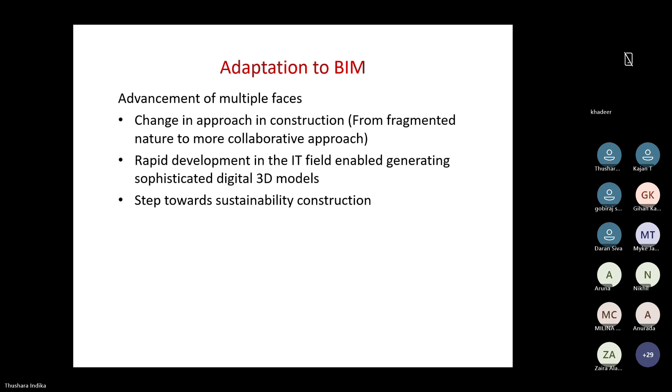One is, of course, to work as a collaborative team, and they have also given recommendations to reduce disputes. So they introduced alternative dispute resolution in their reports. That's why they changed the approach in the UK.

So in the software phase, we started, or the software engineers started programming with machine language like 0101, and then they developed that machine language into something called assembly language. I'm not going to explain all of them, these are IT stuff. Then they moved to structured programming, like you must have heard about C software, right, and database C. And then they moved to something called object-oriented programming.

If you want to know about object-oriented programming, there's a link below to a nice YouTube explanation, about 20 minutes, that explains it very well. We as quantity surveyors don't have to know much about how to do object-oriented programming, but what I wanted to show you is the development of the software.

Thanks to this technology, OOP, object-oriented programming, now they can generate 3D models in the computer. That's why they now have software like Revit that is capable of generating 3D views of buildings or any facility, thanks to a technology called object-oriented programming.

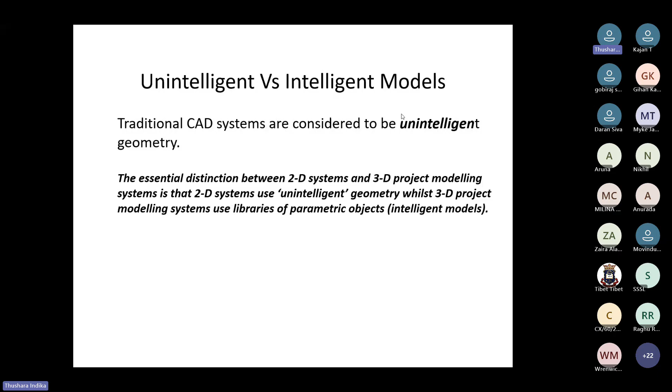But intelligent models use parametric objects like this. You assign the properties of the parametric objects, and the system or computer software will generate the object for you. That is how you generate the 3D model of a building, or maybe a pipe network or any asset. It's not only about buildings - any asset, maybe a bridge, maybe a pipe network, or anything else.

You can generate the 3D model using these intelligent, or parametric, objects. Why do we call it parametric objects? Because we need to assign the length, or the dimensions, and the system will generate it for you. You don't have to draw it, and that is why we call it an intelligent model.

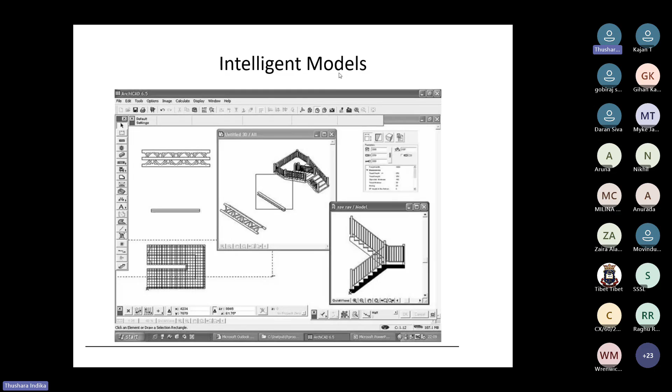So we'll move on. People came up with this idea of a 3D model, moving away from 2D traditional CAD drawings. People were thinking about creating a 3D model, and everyone is working now on the 3D model.

For example, the architect works on the architectural aspect of the 3D model, and the structural engineer can take the architectural model and add his part of the structure into the model. An MEP guy will come in and add his details to the 3D model. So ultimately, you get a proper model that has got everything in it.

Nowadays we use 3D models instead of 2D drawings to do our constructions. That is what we call a building information model.

I saw a small message. Anyway, if you give a small definition for building information modeling, remember this 'building' is not the noun building. When I say BIM, it is building information modeling - it is not the noun building. It is constructing information modeling. In other words, you are building the information on the model basically.

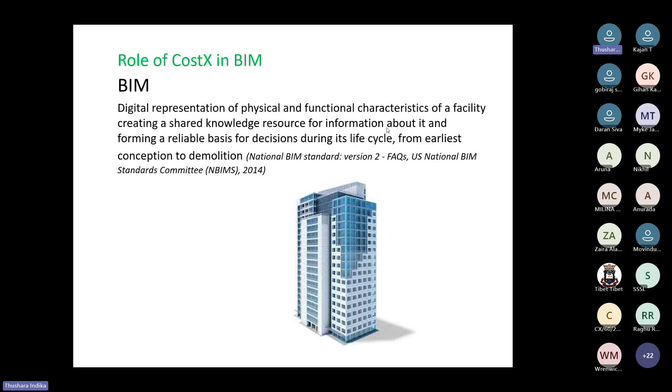And you need to know a little bit about some terminologies called BIM dimensions. Let's say you have a project that your employer has decided to execute on BIM. So obviously you need to buy certain software now, because you are going to move away from your AutoCAD drawings or 2D drawing, and instead implement 3D modeling.

So you need to buy certain software, of course. For 3D, you need to buy something like Revit in your project. You need to get certain Revit licenses. And then there's no point of having only Revit licenses, because we know we have to do the planning or programming part using MS Project, for example. But MS Project does not support the 3D model.

Lately there are BIM software that can be used with the 3D model to do the time planning. Whenever you have that kind of software in a project environment, we have something called Synchro 4D. Synchro 4D is a software that can be used to do the programming with the use of the 3D. So when you have Revit plus Synchro 4D in a project environment, and of course with the project protocol to implement this BIM concept, then we say we are running on 4D.

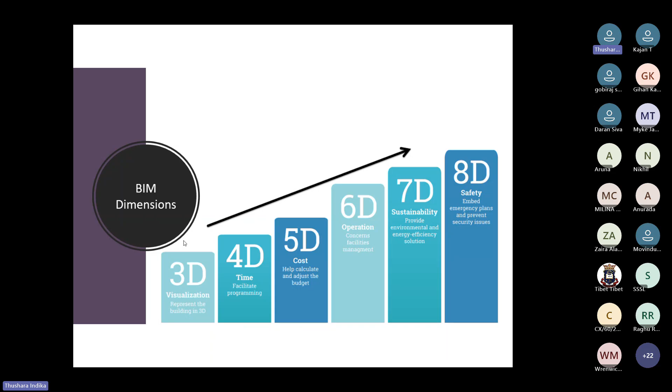Right, I'll take one of the questions. The question was: what about the BIM dimension required at the earliest stage of the project or for a small scale project? To answer that, Sharif, it's a good question because we need to know as a project team - I'll come to that one. I think you brought me exactly to the right slide here.

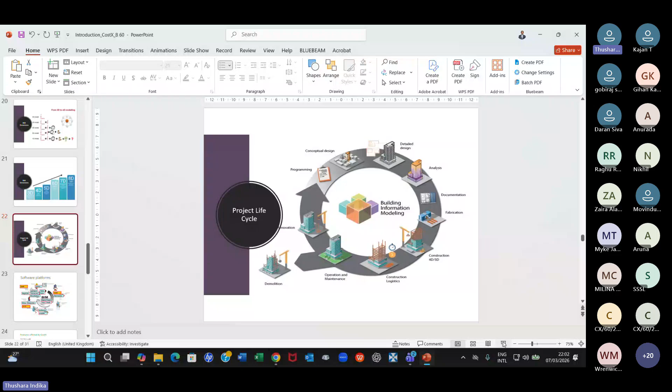So you understand the process of BIM now, because at different stages of the construction project, or life cycle of a project, we use different software to do different things, and all these software are compatible with each other. For example, quantity surveyors do the cost management part, like estimation, quantification, producing cost plans and so on. That is their job, and for that you have a piece of software called CostX.

That's what you are going to learn. But in this, you have the 2D capability also. 2D is not part of BIM, because BIM starts with the 3D model, but CostX offers even measurements from 2D drawings. So in our course, we will first focus on 2D measurements, and towards the end of the lectures we'll have 3D measurements as well. Normally, when we come to 3D, we don't call that 3D measurements, we say quantity harvesting of the 3D model, because you are extracting the quantities from the 3D model.

Now you can see how BIM will work and the project will work. There won't be any as-built drawings as such. It's all about the 3D drawing, and you are adding information as we proceed with the 3D model, so that the facility manager during operation and maintenance can use this 3D model to do maintenance and refurbishment of the building.

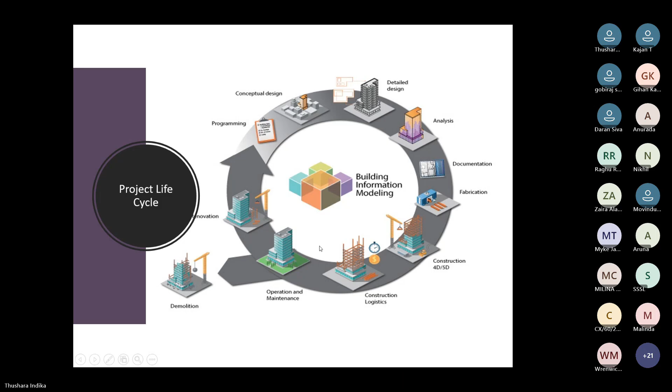So this is kind of a software platform. This is not necessarily the only way to do it, because there are plenty of software now available in the industry. CostX is just one. You have so many software doing the same thing, even Navisworks, for example. Let me take them one by one.

Now, this is the life cycle of the project, starting from the concept design or the programming. Programming is the planning part. Then concept design, you can even use Rhino. You don't have to use Revit for the initial conceptual design, or sometimes you can use SketchUp. You must have used Google SketchUp or ArchiCAD. There are software that can be used for conceptual design, and then as you proceed for detailed design, you can use Revit, and also ArchiCAD as we've seen earlier, and MagicCAD, and then you might need MicroStation to locate the building in a virtual environment.

So you have a lot of software involved in this detailed design. And then you can do energy analysis using Ecotect, or structural analysis using Tekla, and Catia. And then you have something called clash detection.

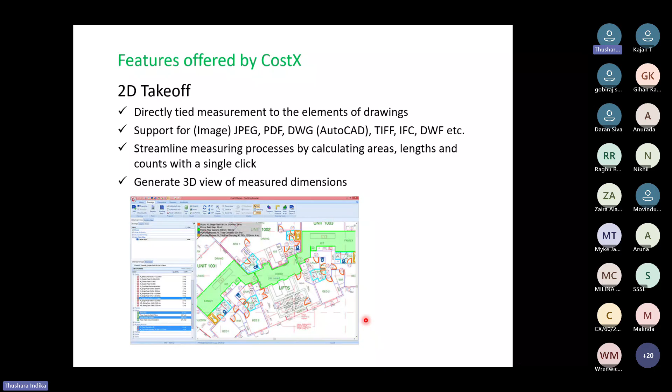Right? When it comes to 3D models, of course, everything is automatic. CostX will - I mean, you don't have to do anything. You have to use certain tools in a certain way to abstract information from, let's say, the Revit model.

You will know how many windows, how many doors, you will know concrete column quantities, slab quantities, and everything will be pretty straightforward. And in no time, you will get all the quantities, right?

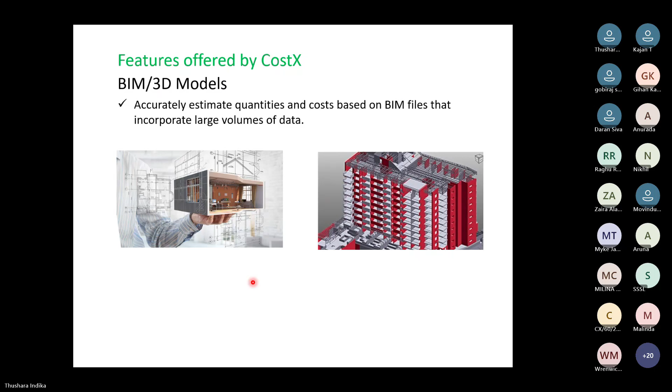When it comes to 3D, CostX is very strong when it comes to 3D model, remember. Though it offers 2D model also, 2D measurement.

Right, then there's something called workbook. We are going to learn about this. And this is where we prepare the BOQ. It's very similar to Excel, but it's not exactly Excel. The beauty is in CostX, you don't have to do any arithmetic like in Excel. When you do manual taking off with Excel, if one of your equations are not correct, you are in trouble, correct? You're in real trouble. So what you do is basically here all the equations are automatic. It is automatically linked to your object in the drawing or 3D model. And therefore, you don't have to insert any of the equation there. And then addition, everything will be automatic. So it avoids all the arithmetic errors that can happen during the manual process.

Right, so that is called workbook. That is where we prepare the BOQ and the estimate.

So you can have the link between your object and the BOQ. So whatever the, let's say there are drawing revisions. Let's say you have prepared your BOQ on a particular set of drawings, and then later after a week or so, you get revision drawings, right? Now, do we have to do another takeoff on the revision drawing, or can we update these quantities based on the revision drawings? We can update the original quantities based on the revision drawing. That is what we call as revisioning, and that is what we call as auto revisioning function. You can identify what has been changed from the previous version to this version.

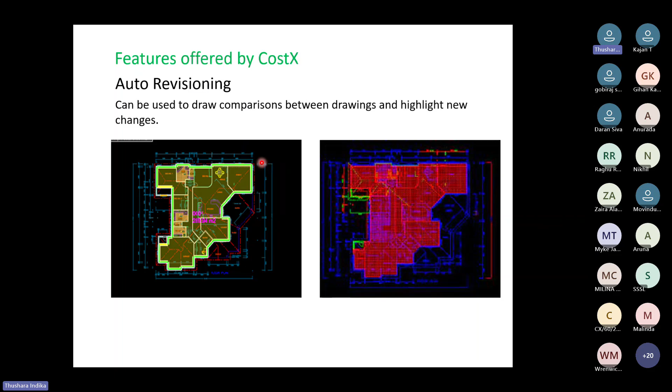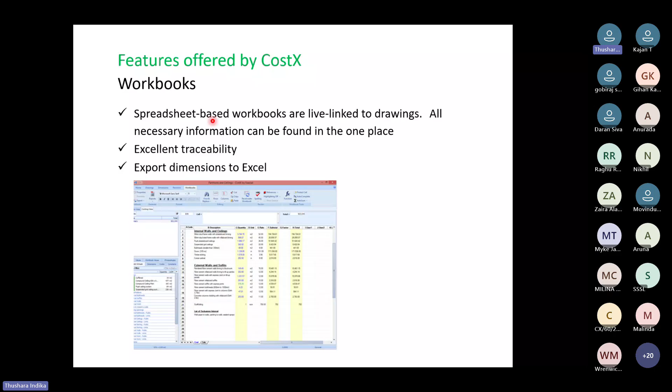So we'll be doing this revisioning as part of our course. So that is called revisioning. And when I get back to workbook, yeah, I think I have explained everything here. But anyway, we are going to do all the demonstrations.

Then subcontractor comparison. This feature is not there in the educational version, but you have to have the license version to do the subcontractor comparison. But I will give you some explanation on that as well at the very end of the course.

And then you can generate reports. So you'll be going through all the reports as part of the course, right? How to generate estimate, how to manipulate your reports. And if you don't want to see, let's say, rates, and you need only the empty BOQ, you can generate that. So likewise, there are certain reports, but there are limitations in the educational version, right? You cannot produce every kind of report in the educational version, but we will show you how to generate reports, how to generate various reports as part of the course.

Right, so you have seen advantages of CostX: increased productivity, accuracy, traceability, and consistency, presentation, and you can keep it for future proof, right? So you have a lot of advantages, and it's part of the BIM process. So knowing CostX will give you an added advantage as a quantity surveyor and face in the future, basically, right? You are getting ready for the future, right?

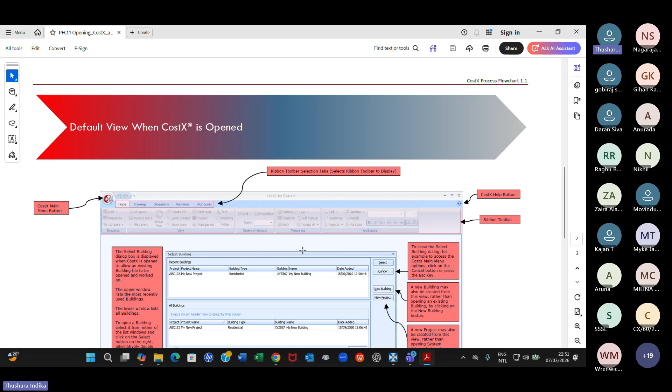Yeah, okay, just an introduction about some of the menus here. You can see this is what we call the ribbon toolbar, where we have file. Now instead of this, you have file, home, drawing, dimensions, revision and workbook, and subcontractor in the license version. So this is called ribbon toolbar.

And then under that, for each tab, you have another toolbar. If it is drawing, you have another set of toolbars down here, right? That is also ribbon toolbar. And then you have the help button. Yeah, so that is it.

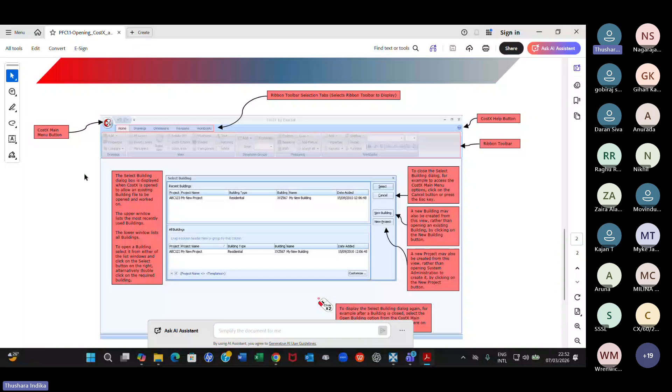Now, for example, if I go back, if you go to drawing, we have a different set of icons here. When you go to dimensions, it has a different set of icons in the second toolbar. If you go to revision, you have a separate one, and workbook too. That's how it has been designed.

Now let us add a drawing now. Okay, let's say you have created a folder, sorry, building, first of all, called accommodation building. I just wanted to show you a few things now, some of the functions, how you add a drawing to this folder that you have created under accommodation building. Okay, so you are going to add a drawing to your accommodation building. So that is the starting point because you need drawing to measure, correct?

You need drawing to measure. So under accommodation, you have to then add drawings to measure. Right, so since you have created the building, now you are going to add the drawing under this folder. For that, you have to come to this drawing tab. So whatever you are doing with the drawing, you are doing with this drawing tab.

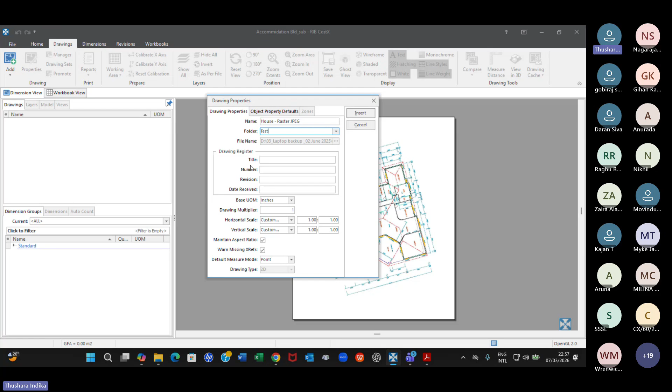Let us add this. You're not going to do anything else, everything will be default. I'll put insert here. Now you can see that the drawing has been added, under the accommodation building.

Now you have this. You can see all the icons are activated. Earlier it was deactivated, under drawings it was almost like blank, gray. Now everything is there, now I can show you a few things.

I think the first thing would be, let us do another drawing, I'll add another drawing. Let us add a PDF drawing, because this is a JPEG. I told you at the very beginning, you can even measure from a JPEG. I'm going to add a PDF drawing, and also I'm going to add an AutoCAD drawing, just to show you how to add, that's all.

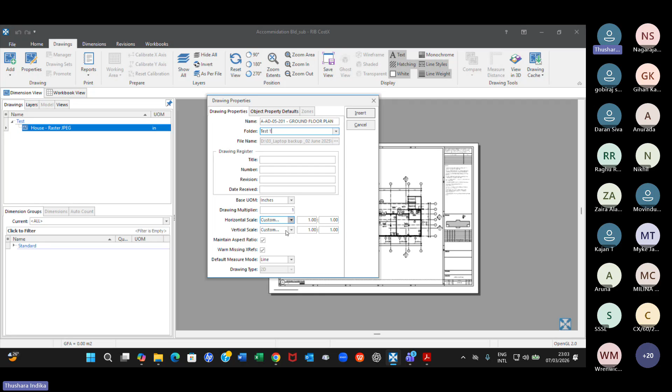And the folder, again, test. So what happens is otherwise you have a folder called test here already created, so this drawing also will be stored under that folder. If you change the folder here and create another folder, let's say test one, just for the check, right? I'll say test one, everything else is the same for the moment, and insert. Now you can see the earlier drawing here was stored in the test folder.

Now this drawing is under the test one folder. You can do structural, architectural, MEP. Likewise, you can store your folders within this, and store your drawings under each folder. We'll do it later. Now I'm just trying to show you some of the features, that's all, and how to add a drawing.

Now I have done test one, and that's a PDF one. You can see, I'll show you how to zoom in, zoom out, and all this later. I'll do another one, a CAD drawing. I don't have even AutoCAD in my computer, but now you can see I can open an AutoCAD drawing in CostX. No AutoCAD here, but I can open AutoCAD in CostX.

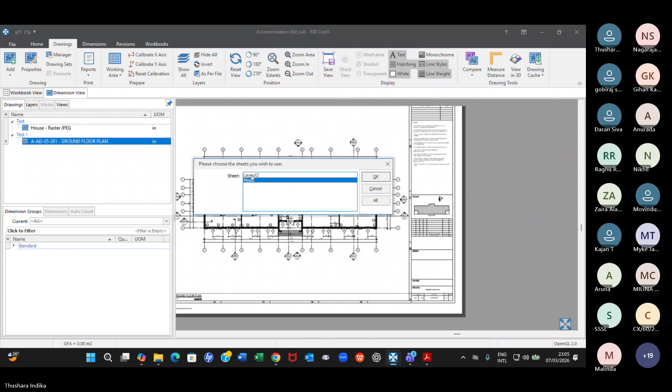Now, again, I'm going to add another drawing, an AutoCAD drawing now. Drawings, tiny arrow, add drawing. And now I'm going to the CAD folder here and open, let's say 201 here. It will ask you whether you need to load the model or the layout. Normally we go with the model because the layout is confusing, you will have so many layouts there. So you go with the model. Yeah, this is what it is.

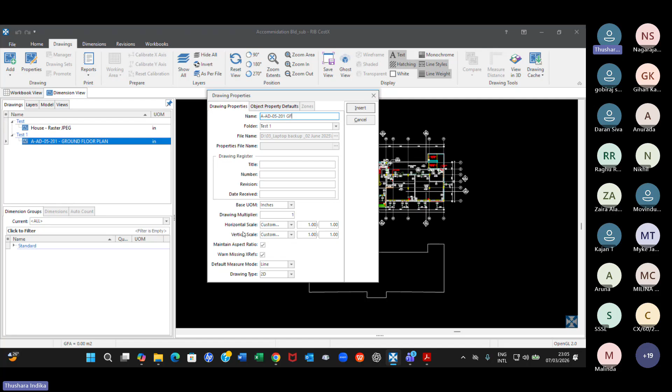And here, drawing number is not enough, so you can say ground floor. And I'm going to store it under the same folder called test one, because it's an AutoCAD drawing of the same thing, 201 ground floor, here also ground floor. So I don't change any of these now. Insert.

Right, now you can see I have uploaded 3 types of drawing. One is a picture or JPEG, you just click on that and you will get that. Then the PDF, and then the AutoCAD. Now you can see I can open any drawing here, JPG, various types of file under 2D. This is PDF, and this is DWG, which is AutoCAD.

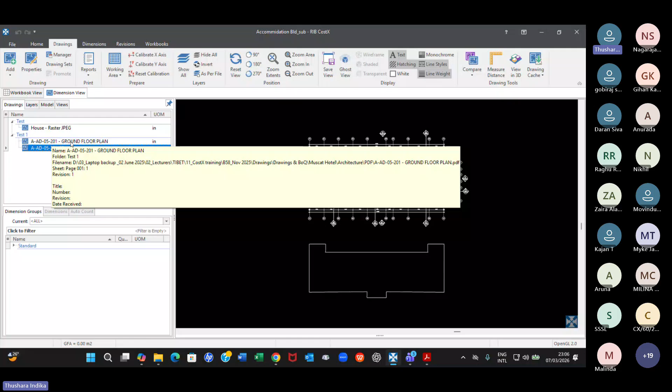Now let us play with this a little bit, because we need to understand a few things here. Start with an architectural drawing, for example. If you want to zoom in, zoom out, how do you do that? There are different ways: one is with the mouse, and one is with the icon here. You can see zoom in like any other program. You can click on that, zoom in.

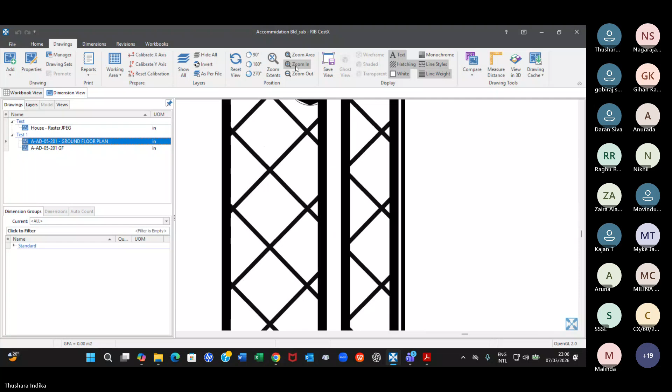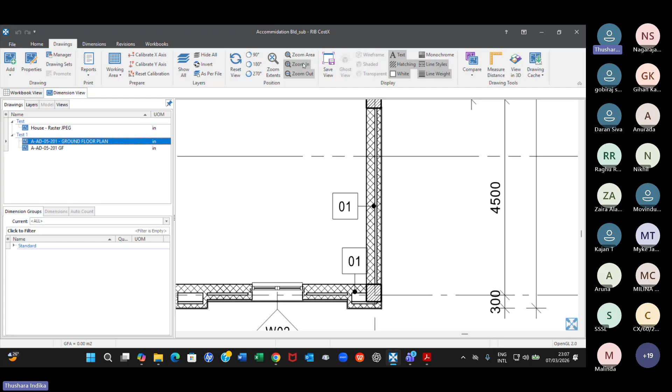And if you want to go back to where you were, you can do zoom out also, but then you have to do it one by one. Zoom out, zoom in. But if you want to go to the starting point, we have something called reset view here. Then you go to reset view directly, you don't have to go through zoom out. So I'm just teaching you zooming.

Zooming using the icons here under the drawings tab, because these are very basic functions of CostX. Zoom in, zoom out. If you want to do zoom area, it's almost like AutoCAD or any other measurement software. Zoom area, like you just give a zoom area and you do that. And if you want to go back, reset.

Can you practice that? Zoom in, zoom out, zoom area, and reset.

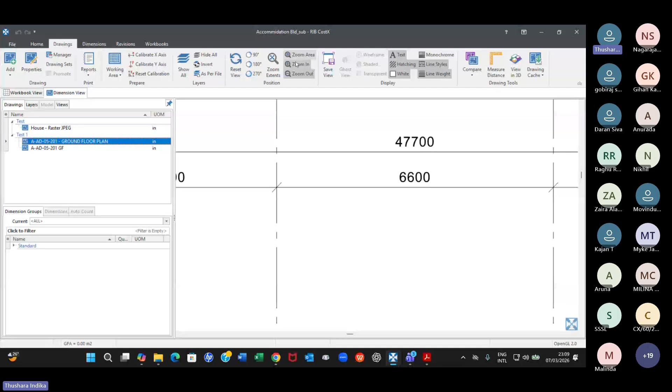Using the mouse wheel, you are very familiar with that function. You don't have to go with this, you can use your mouse to zoom in and zoom out. And how do you move this drawing? Let's say you want to get it here, you lock the mouse wheel. Can you do that first? I will give you 1 minute to do the zoom in, zoom out with the mouse. Use the mouse wheel, okay, that's all, just the mouse wheel.

And then even with this, you can do the reset. So one is using the icons, and then using the mouse. And then you have how to use shortcuts.

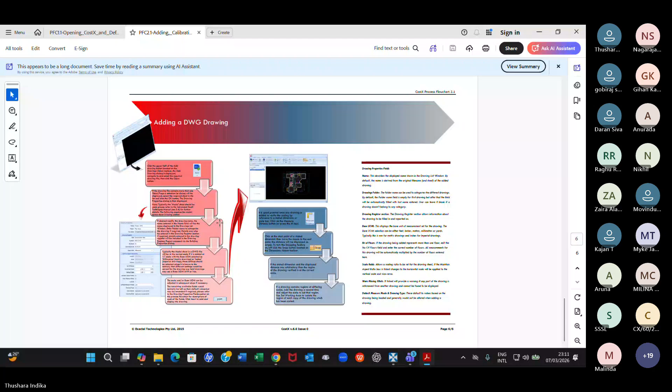We were talking about zooming. We use the mouse, the ribbon toolbar - we have done this part, right? And the mouse wheel. And then how to use the keyboard.

What you can do is use the plus key to zoom in or minus key to zoom out around the center of the drawing window. Let's try that out. We don't normally use it, but let us use it.

We're talking about zooming. Use the plus key to zoom in and minus key to zoom out. Let's use this plus - correct, shift and plus. That's how you use plus anyway. Minus, you do this.

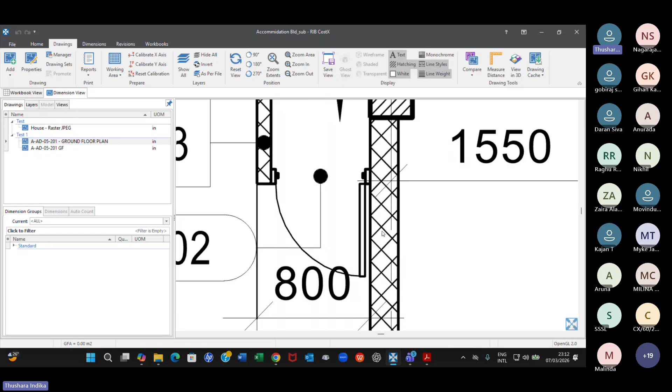And if you want to reset, you reset. And then you go to plus - that is also possible. Minus. Okay, can you practice that?

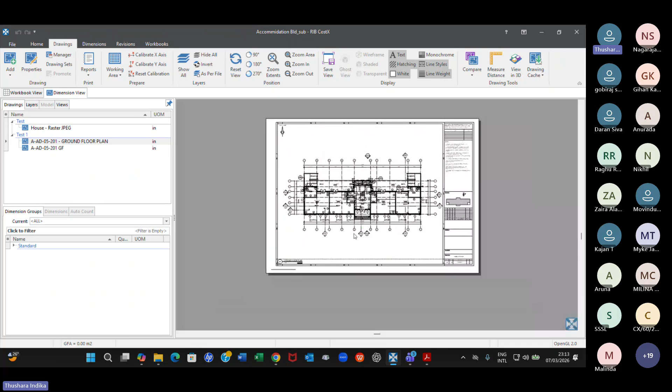So there are three ways to zoom in, zoom out. One is using the ribbon, then using the mouse wheel, and then using the shortcuts or keyboard - shift and plus, basically plus. Plus you cannot use without shift, and minus is the opposite. So can you practice this one? Zooming in three ways, and you can make a note.

If you can't make a note now, I think the best way is you go through the video again - replay it, probably with fast forward. You can put it at 1.5 times speed and do a short note on how to zoom in. Do a small line diagram or flow chart, zoom out with the keyboard, like this. You have to do your own note, then only you will remember. Otherwise I can give this to you, but there's no point.

Use your own notebook - using the keyboard, how to zoom in, zoom out, using the mouse how to do that, and the ribbon which is easy. Anyone knows, even a small child will do it nowadays - they will click on this and see what is going to happen. You always use the keyboard also because that is fast sometimes rather than using this icon. That is zooming.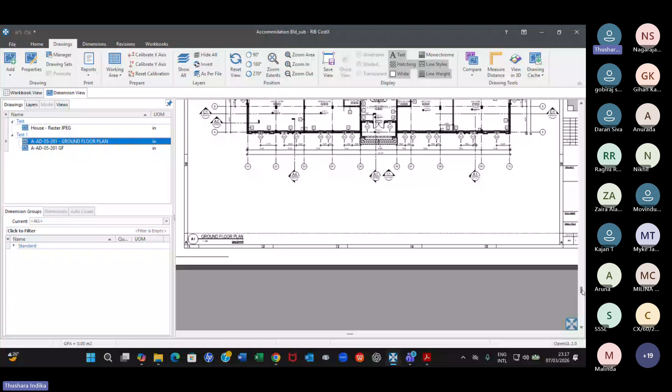But diagonally you don't have, right? You can move vertically and horizontally, that's all, like any other software. But here with the mouse, you can even move diagonally - that is not possible with these sliders. And if you want to go back, reset. So that is using the toolbar.

And how to use the keyboard now if you want to move - you can use arrow keys here. You just use the arrow keys, and you can use the keyboard to navigate through this.

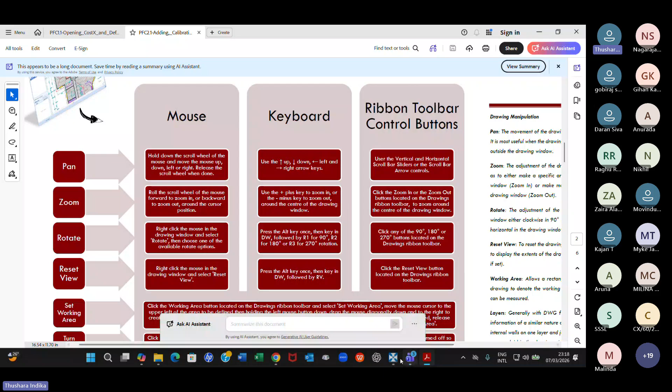Just arrow key. But remember, now you have selected this drawing before you do anything - that is why it is appearing here. So you have to select an appropriate drawing, then it will appear here. So you can do all these functions for even AutoCAD or JPG. Now you have to practice. So I have used a PDF drawing - next I will use an AutoCAD drawing.

So how to navigate - panning, arrow keys you can use up and down and then horizontally again. So mouse is a better thing, right? You use that anyway because you can zoom diagonally also - sorry, you can pan diagonally also.

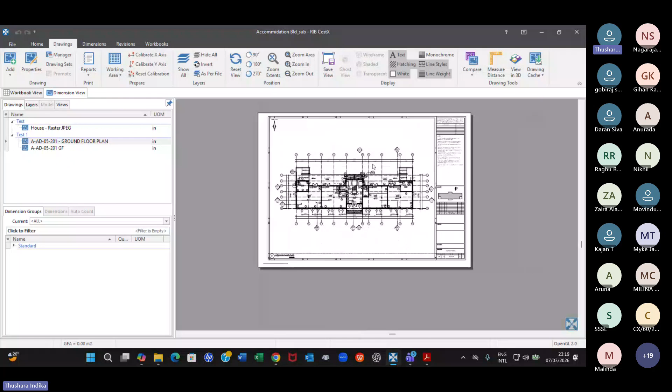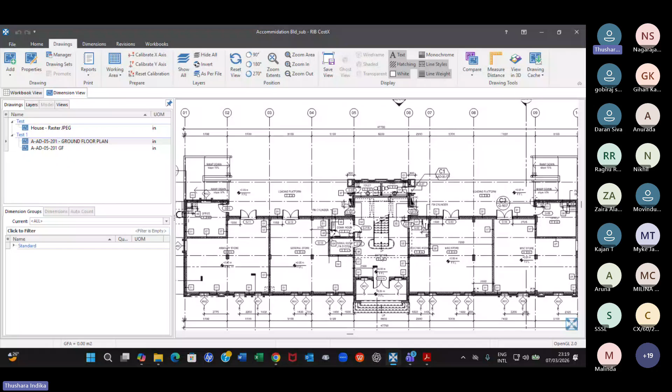There's no hand here like in PDF. You right click and you don't have any panning here like a small hand you used to see in PDF - you don't have that. Panning can happen from the mouse - lock the mouse wheel and then move around. So I hope you are happy with these two functions, zooming and panning. You have to just get used to them.

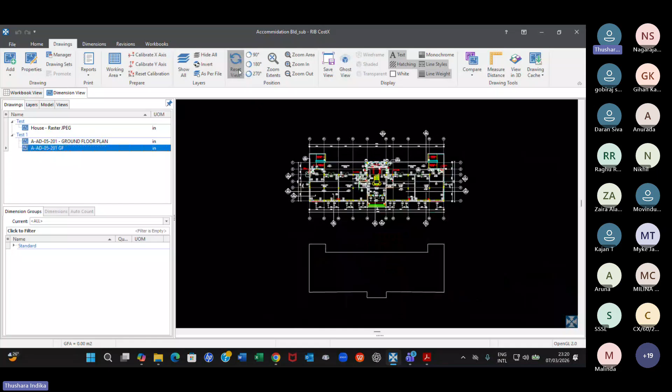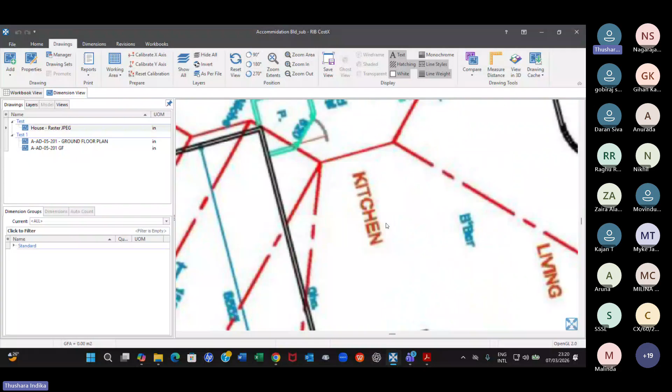You can, if you want, use AutoCAD drawing here and also do the same function: zooming in, zooming out, zooming areas, reset. You use the mouse, plus sign and minus sign. Same thing, whether it is AutoCAD, PDF, or JPEG, it's the same. Use the mouse and plus, minus. That is zooming, and panning similar to the previous one.

It's zooming, panning. And use the arrow key.

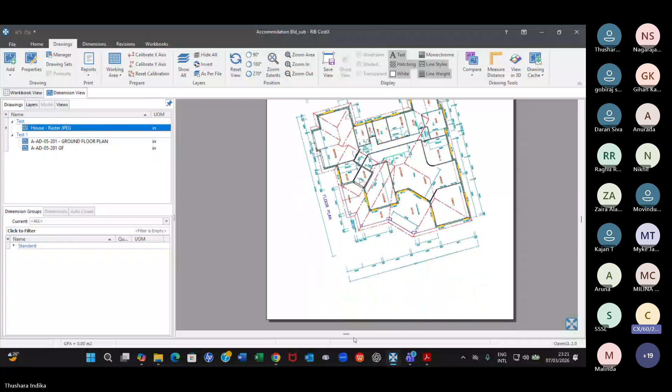So when you choose in the AutoCAD file, I have there are two layouts and models. Which one do you choose? You have to use the model, otherwise all the layouts will come. So when you add the drawing here, when you select this one, for example, it will ask you whether layout or model.

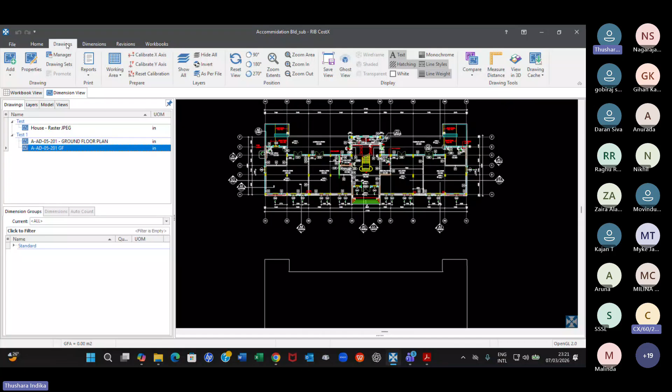No, let us see that one also because you need to experience this. Let us use the layout, I'll show you the difference. Otherwise you are just listening to me. You have to do some trial and errors. So let's say by mistake you have selected layout, nothing is going to happen. It says you have selected one or more paperspace, okay, say okay.

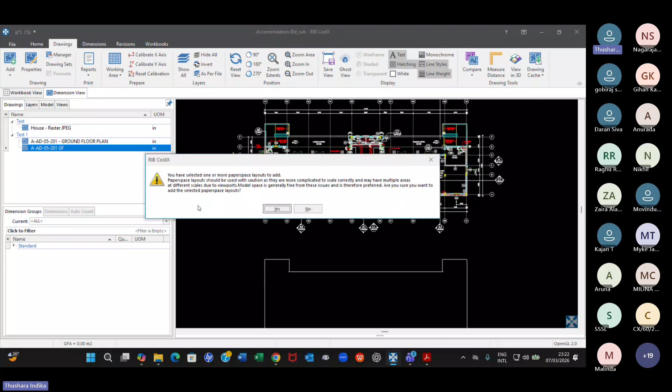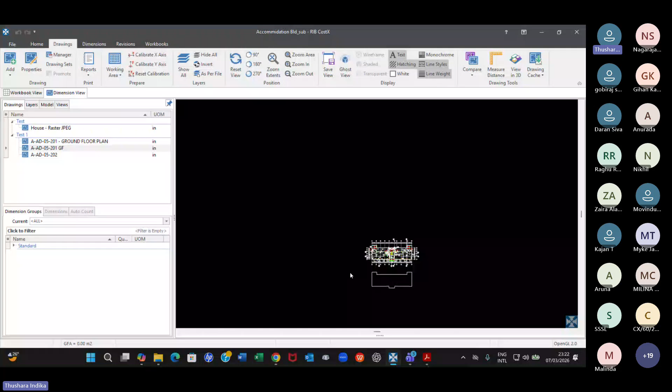I say okay, now you can see. Now this is the model. You see earlier here you have other things also. You know the difference between layout and the model in AutoCAD, right? When you use the model here, you will see only that. But when you have layout, there could be so many other drawings also drawn on the same layout, correct?

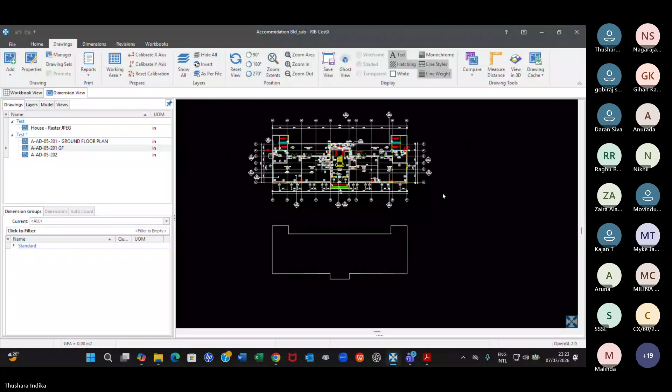So it's okay, you can use any of them. But to make it clear, sometimes you can use only this one. We use this normally. So either one is fine, but you have to select the appropriate drawing for you to measure when you measure. But you can even use the layout, that's okay. Then you get this.

You can just add that one also, same thing. Then it will look like a drawing here. And this will, of course, the space - you know the difference between layout and the model in AutoCAD. So same thing, it's a good question.

So you have done panning and zooming even with all these three. So you have to practice. You didn't ask me one thing.

If you have a PDF with multiple pages, that is what you get normally nowadays, right? You get sometimes a combined PDF, in other words. See what happens - when you apply or when you add a drawing with multiple pages, you will have some problems, because you have to give one by one. How can you add a drawing with multiple PDF like this?

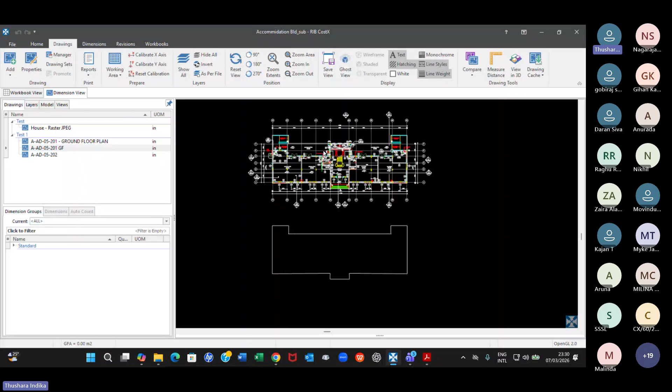Okay, now we have done panning and zooming, so let us stop there. We can further discuss other functions next week. But before I conclude today's session, I'm going to show you what happens when we have multiple PDF drawings and when you want to upload, what happens.

So go to drawings, and I select that multiple drawing thing. PDF sheets, open. And now it will ask you which one you want to upload. Earlier you didn't get this kind of message, right, because you had only a single PDF drawing. When you uploaded the 201 ground floor plan, you had only a single one, you didn't get this. Now CostX identifies that this particular file I was trying to upload has multiple sheets.

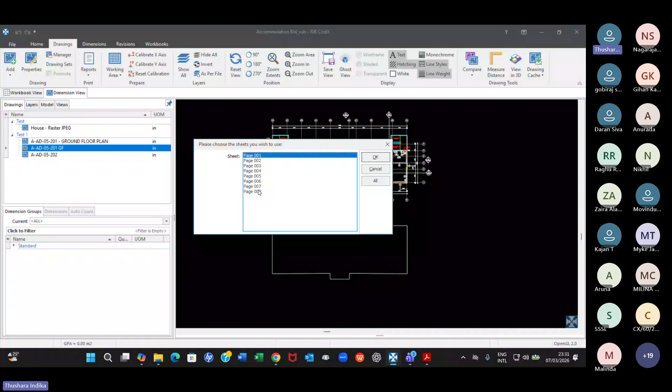For the moment I'll select 1, okay, or I'll select 8. I don't know what is inside, I'll select 8, say okay. This is what, okay, then you can give the name. Let's say standard drawings, standard details.

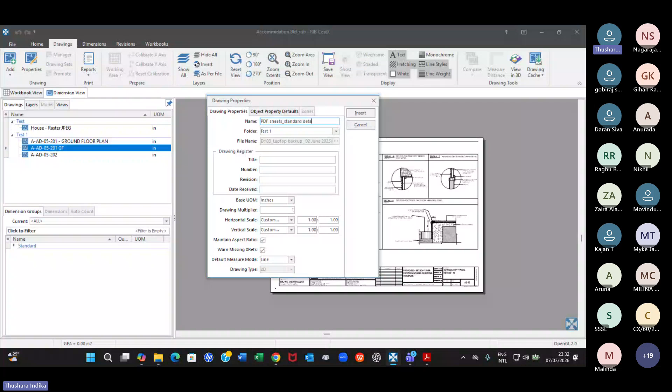Say insert, and I'll use the same test1 folder. You can see what's happening. So I've selected 8 of 8, and I have renamed this as standard details. So I can select whatever file I want from those 8 pages. Now you have learned that one also, so the same thing, zooming and all these things will be the same.

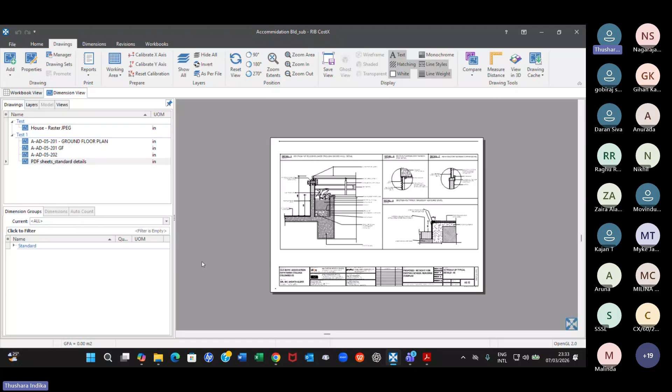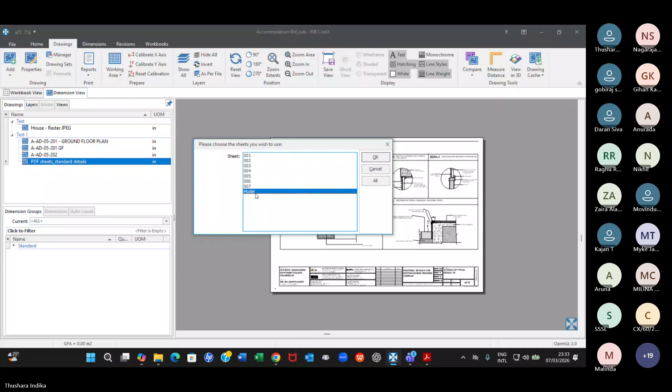Now I have another one. I'm going to add another one with multiple layouts, this one here. I'm going to open this. Again it's asking me whether you need the model or sheets, so let's use the model. Model means you have everything in one. Okay, multiple layouts, I'll say okay, and give some name, just test.

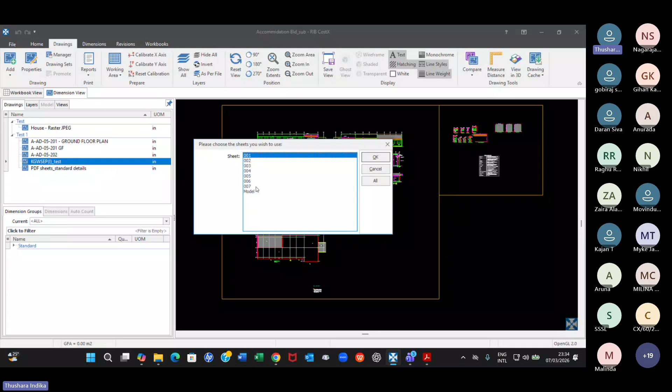And now you can see I get only that page with the docker and everything. So that is the difference. If you use the model, you will get everything together like this, you get everything like AutoCAD layouts, same thing. And if you get the layout, you can get only this. So that is the difference.

You need to be careful when you have so many files in the same drawing, because you have to select the appropriate one for the measurements. That's all. Otherwise, whether you upload this one or that, it doesn't matter, only thing is you have a proper name here then. Because here you have all the elevations, plans and everything together, you will get confused a little bit when you have so many drawings. But here it's not the case, you can name what it is, maybe ground floor, first floor, or section, or standard details. You can name it.

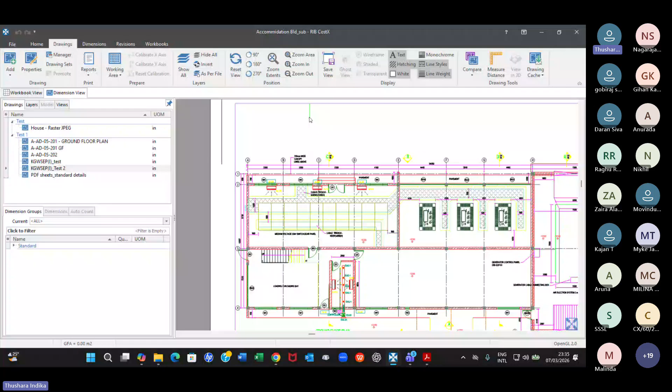So I'll stop here. Now I have told you how to upload a drawing, whether it is JPG, PDF, or AutoCAD. And if you have multiple AutoCADs, that is also I have shown you, you can select whatever sheet you want to upload. And when you have multiple layouts, I have shown you how to upload, you can upload the entire thing here or use a particular view. And then I have shown you how to do zooming and panning. So that's enough for the moment. We'll start covering other basic functions later, and we'll start measuring a substructure next week.

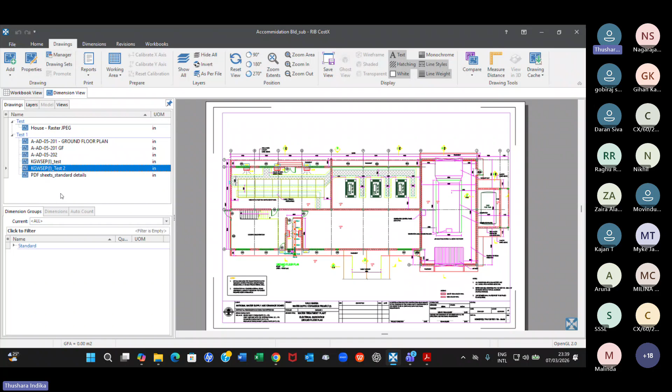So I opened the AutoCAD app before running the CostX app - do we need to open the AutoCAD file first? No, no, no, no need. Everything will open in CostX only, so you don't have to open anything before CostX. For example, everything I've done is in CostX - I opened CostX and uploaded all the drawings into CostX, not anywhere else. Even I don't have any AutoCAD on my computer, but now I can open AutoCAD files in CostX and work as if I have AutoCAD.

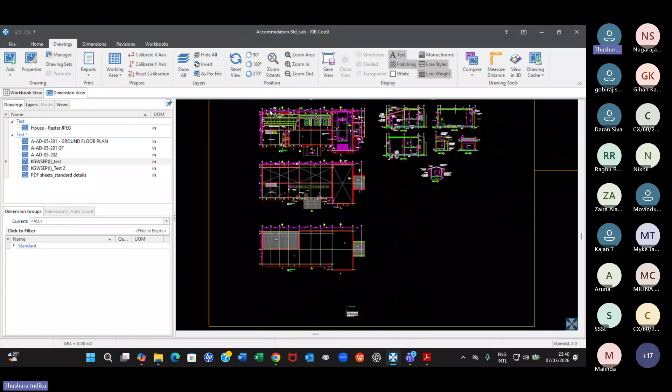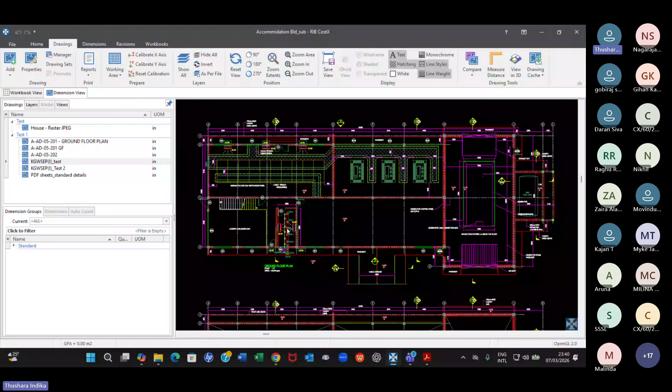I'll show you how to measure. I don't have AutoCAD on my computer - you can see here if I click AutoCAD, no, I don't have it, only AutoCAD Viewer. I'd have to download it, I don't actually have it on my computer, but you can see I've uploaded the drawing into CostX. That's what I said at the beginning - I can upload any drawing into CostX and work, because CostX has the ability we call interoperability. We learned that word during the lecture - interoperability. CostX has the ability to work with any other software, including JPEG, PDF, any IFC file, 3D model, or Revit.

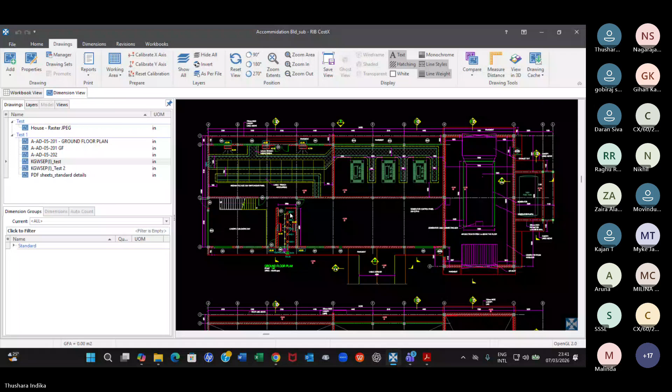So you don't have to open any of these before you load them into CostX - you just select the file, that's all. Go to drawing, add drawing, and select whatever files you want to add, AutoCAD or anything, you just add it and open it here. Is that clear? Yes, clear. Thank you. Right, good, good.